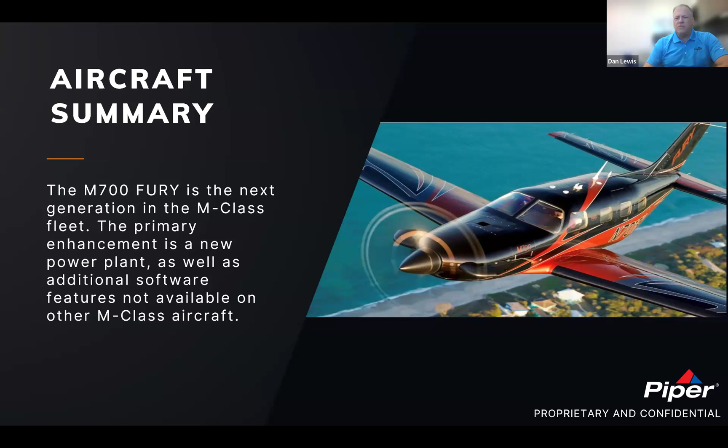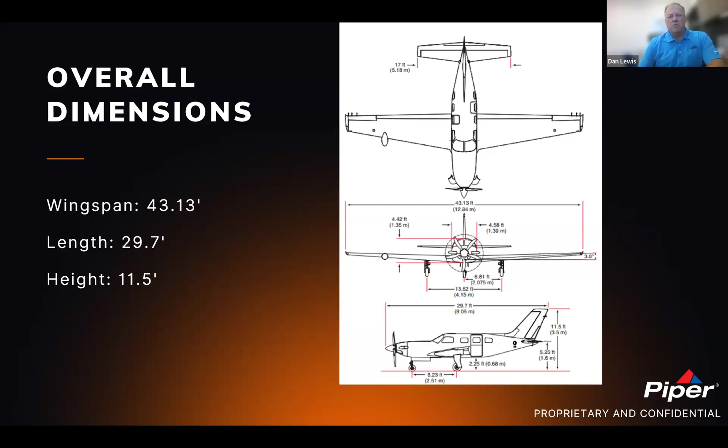The key change, of course, is the Pratt & Whitney engine from the Dash 42 to the 52. Overall dimensions are the same. However, if you look at a POH and compare an M600 to an M700, there are some slight changes in the wingspan noted. This is because when we recertified this aircraft, the actual airframe didn't change, but our ability to measure it more accurately did. So you may see some changes in the actual POH, but rest assured it's the exact same size wing, tail, fuselage, and so forth.

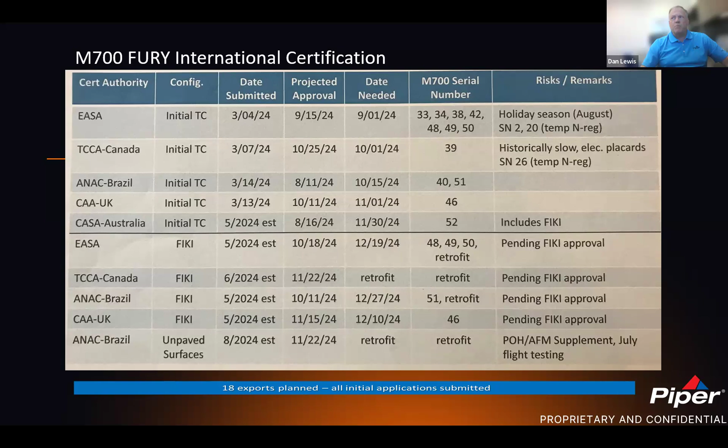I just wanted to go over real quickly for those attending internationally - we are in the process of all the aircraft certifications where we have current orders on the books. We are very close, I think, to our TCCA Canada type certificate. Not holding my breath yet, as with any bureaucratic government type agency, but these are the projections and when we need them by. We're looking at most of these in the late third quarter, potentially fourth quarter in some cases, but the majority will be the second half of the year, to correspond with the order book we have with our regional dealers in that area.

I'm not going to talk much about the power plant and electrical, just because we have Pratt & Whitney on board and I don't want to take their thunder or their time, but we'll go over it real quickly. We went from 600 to 700 shaft horsepower. We went from the PT6 42 to the 52. All current production is a 5-bladed propeller versus what we've had, the metal 4-blade, in the past. You could upgrade to the 5-blade - we just certified it with a 5-blade. There isn't really a current STC or plan at this point to go back to a 4-blade, but it could always be in discussion.

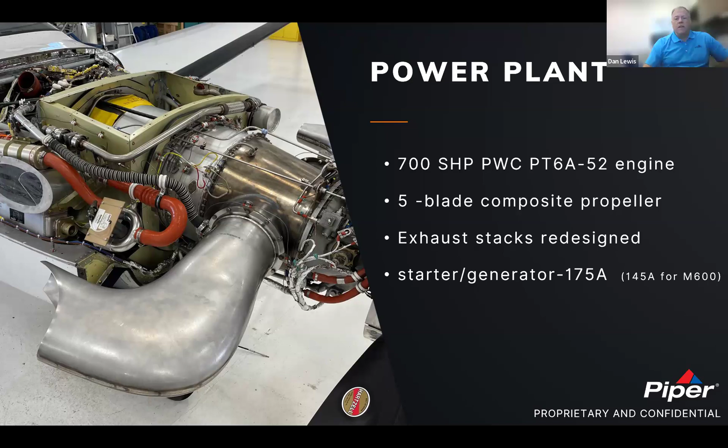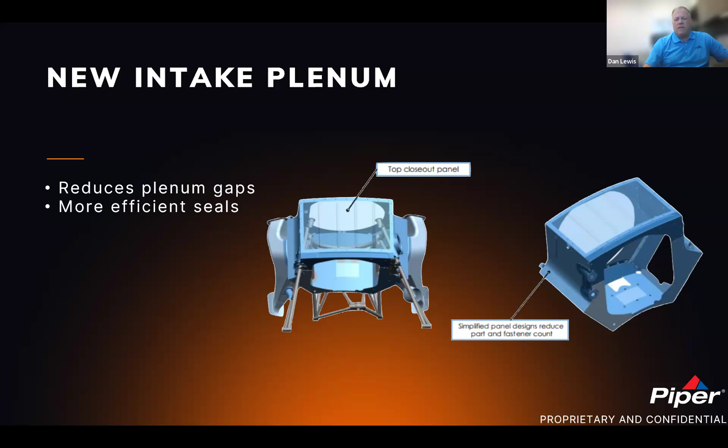Starter generator and battery have all been increased in power and support. You'll note if you get in a 700 versus a 600, it spins up a lot faster, and the starting power generates it to be a lot cooler. So from 145 amp to 175 amp is the big change there. We also reduced our plenum gaps to be a little tighter, so the airflow and pressure inside the engine compartment is a lot smoother, more efficient for the airflow.

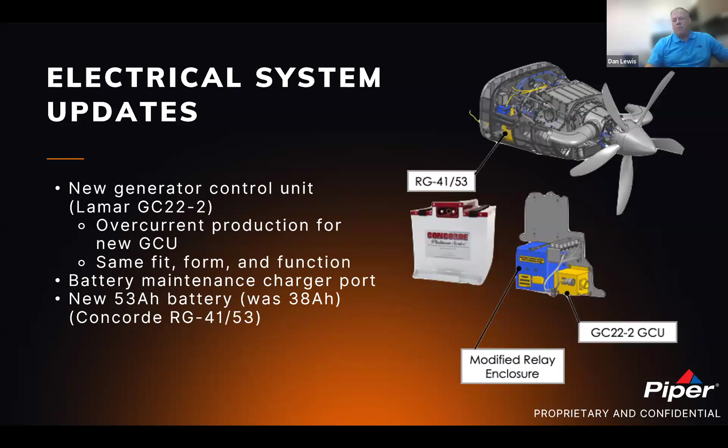On the electrical system, like I mentioned, we've updated the battery, but we've also done a battery maintenance charger port for the new 53 amp hour battery. So you can actually have a charging port now capable for your battery chargers. This battery was previously a 38 amp-hour battery; it's now 53 amp-hours. So this is the bigger battery you could upgrade to in the past - now it's standard.

In addition, before every flight you'll get in the cockpit, and if you have a CAS message that says oil level low, there's a float switch inside the dipstick compartment area that's basically telling you it's about 3 quarts low. You would need to add oil for your mission, and that sensor comes on based on a maximum mission. So if it's a 4.5-hour flight, you'd need to recognize this CAS message before you start the engine. If you know it's a short mission, maybe you just need to go to your maintenance facility less than an hour away, you could effectively ignore that advisory white CAS message.

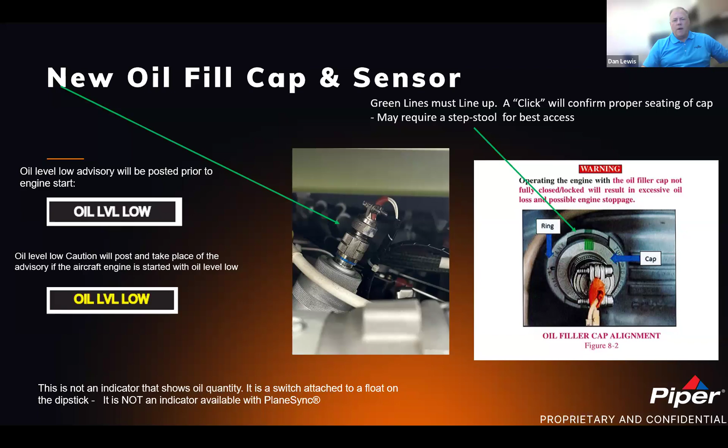You might run through a bunch of those. They are easy to break. I've stepped on them and it snaps them really quickly. But it comes with one with every aircraft. Use according to the POH for your towing capacity or towing limits.

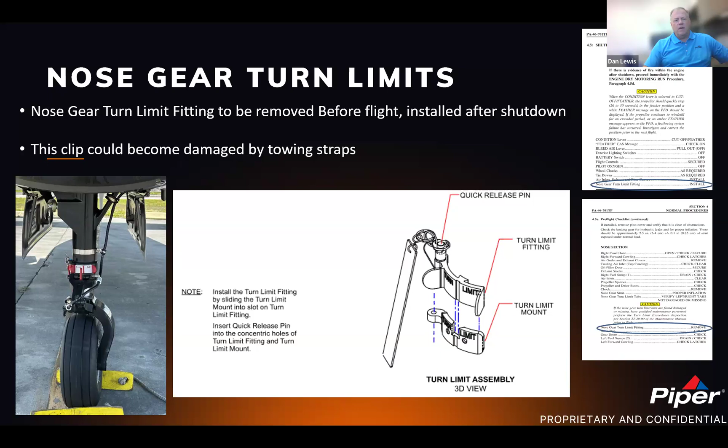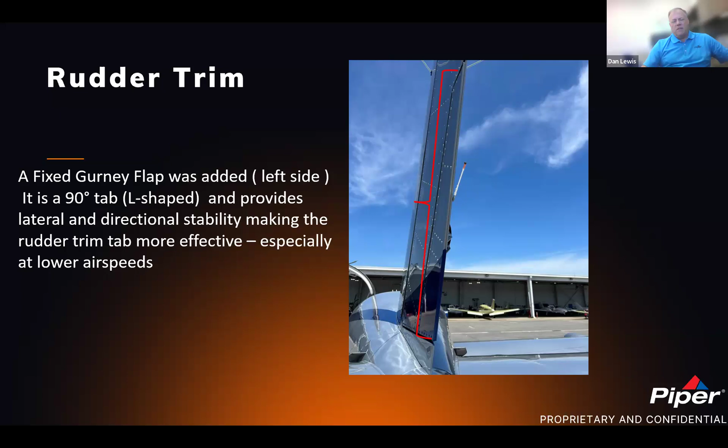One of the other changes we made to the new aircraft was we added a gurney flap, an L-shaped strip that goes right on the tail of the rudder trim. You can see in the picture I've outlined it, but unless you walk right up to it and probably feel it with your hand, you wouldn't notice it. What this does is enable the trim tab to be a little more effective in slow flight, giving a little more directional stability. I've noticed it a bit, especially on landings — it's just a little more stable, not as mushy.

The other big enhancements you'll recognize, some of which bleed into the 600 world and 350 world currently, are the new software enhancements, mainly designed for the G3000. One thing we've complained about, and I complain about it all the time when I fly the 600, is that anytime you brought the foot-pound torque back to 420, you'd get the check gear message. It's a nuisance message, especially when you're between 400 and 800 feet — it's just an annoyance, especially for passengers who don't know what that means.

So we've adjusted it in the software, so now you don't see that. If you're up at altitude doing slow flight or training, you won't get that check message. Or if you slow down and your torque drops below 420, you'd normally get that message, but now, above 800 feet, you won't get it. So it only activates in the landing phases of flight, or right after takeoff if something goes wrong.

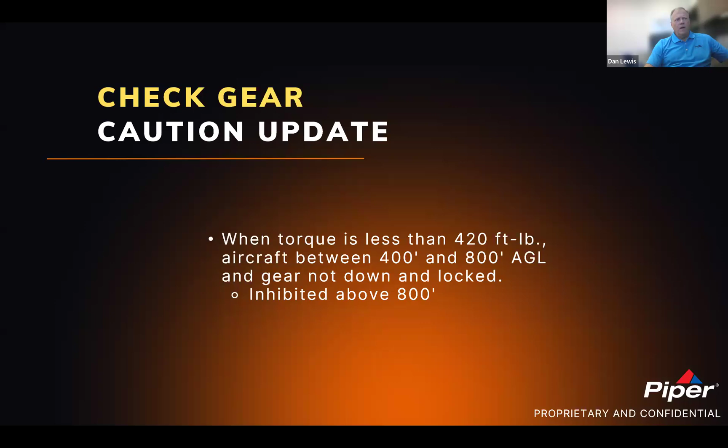So that nuisance message has gone away, and that's also true on the 600 and the 350.

Some of the new gauges you'll see, if you look at the pitch trim and yaw trim, the yaw trim looks offset to the left. That's because of the new travel and torque on this more powerful engine, it's just depicted that way on screen. It's not really offset, you still have torque factors requiring right rudder on takeoff. This is just how the setting depicts itself on the software screen.

So like on the others, if you're using auto throttle or doing a takeoff, it will chime at you if you're not in the green boxes. You'll note the green boxes are a little bigger now. You have the capability of setting it on the front end or back end of that green box, depending on your weight and balance, to help with takeoff, rollout, and initial liftoff.

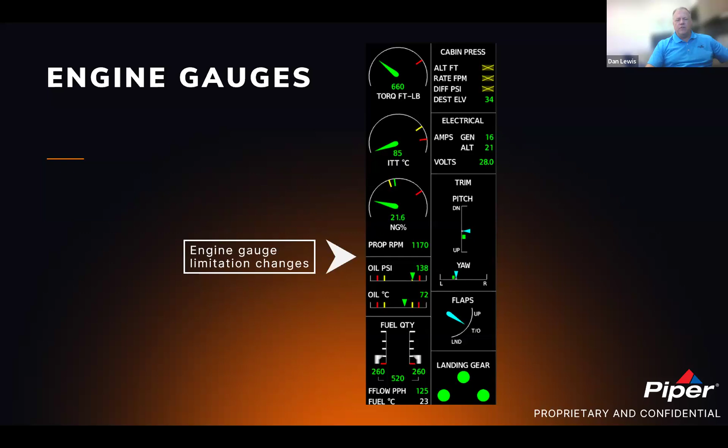Some of the other enhancements we've added to the G3000 are these synoptics pages. So you have de-ice, electrical, landing gear, engine, fuel, and aircraft systems. All of this is found in your homepage systems folder and utilities folders, which we'll go over a bit today. But these are just some examples.

If the boots are running or certain things are turned on or failed, it'll be depicted on this screen. Some people fly with the screens on. You still get normal messages on screen when things are activated, like the 3 green lights for takeoff, or gear up and gear down. But you also get the landing gear synoptics page, which gives you a more visual bird's eye view of the aircraft, showing what's working and what's not.

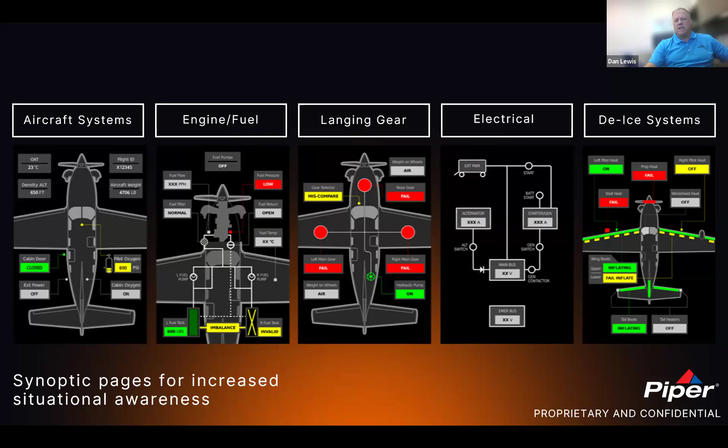Same with your electrical. On aircraft systems, on the far left one, you'll see where your pilot oxygen tank is and your cabin door close messages are. You can't turn around behind you and look at the gauge on the oxygen mask anymore. That visual tactile gauge for your oxygen is gone. You'll only see it under the synoptics page in systems.

One of the other features for all 3 models is the weight and balance page. As you go through your preliminary check prior to takeoff, loading up your pilot, co-pilot, and other passengers with their location arms in the system, it'll automatically calculate your weight and balance envelope on the left side. That's very good. Double check that your basic empty weight and zero fuel weight look accurate based on your POH. Each aircraft is a little different depending on the equipment installed, but it's been a nice system to have.

You can actually show passengers or family members who don't want to move out of that aft seat and into the rear facing seat for takeoff, that until they do, you're out of the envelope. So this is quite helpful.

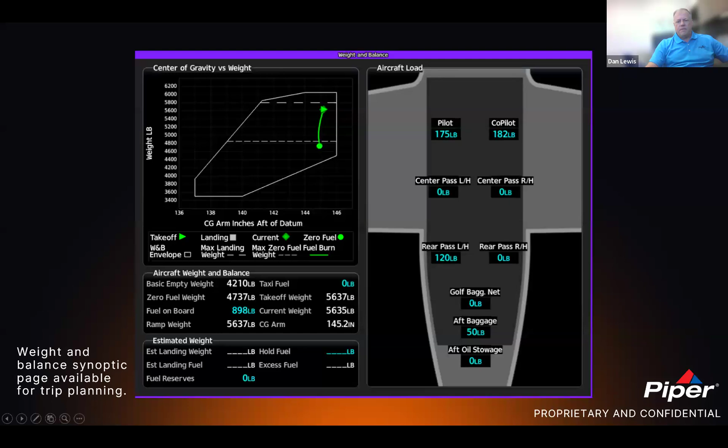Now I can get my mouse to the right place. There we go. Some of the other things we've added is a glide range ring. This is not turned on by default, though it's probably not turned on a brand new airplane unless I've done a check ride or flight with you on your acceptance. But it can be turned on easily enough in the setup, avionics setup page for your maps.

You'll see the ring looks a little jagged. This one was taken off of our test bench, so you won't see wind, for example, but it does have a wind calculation that constantly updates based on information received through ADS-B or XM weather, which helps change the shape of this ring. The higher you go, obviously, the bigger the ring. One nice thing is it will jut in or have a cutout if there's a tower. If you look at the right lower quadrant of the first picture on the left side, you'll see a tower.

And that's why it juts in like a sharp edge. It's because it knows that tower's higher than the terrain, and if you were to glide there, you would hit the tower. So it's giving you that information.

It'll also put up the capability of going on your glide. It points an arrow on the right screen and will direct you. Again, you have to turn this on, it's one of those functions you actually select. Some people don't like the range ring, or don't want the nearest airport, but it will point out the airport and give you an arrow.

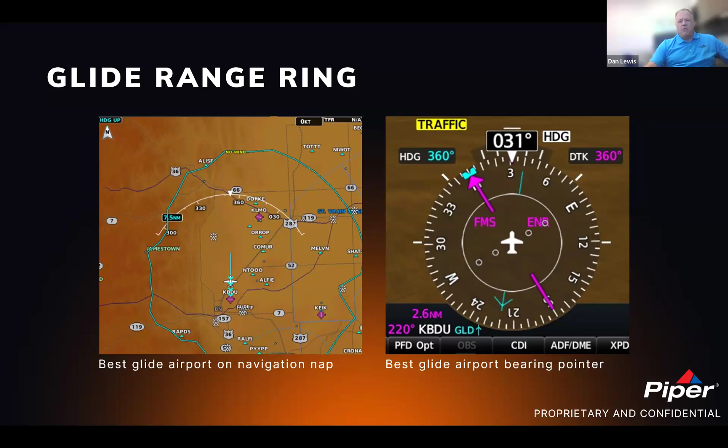So on this slide, it's showing you which runway you're headed to and which airport you want to go to. And then you can set up your navigation to help get you there. It's not automatic, but it will help guide you there at this point. It's not an auto land, or an auto glide.

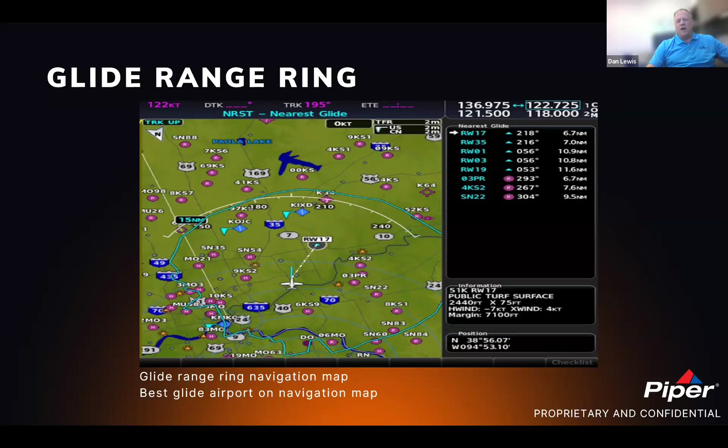So on the home page, you'll see some changes. If you have the taxiway routing option, you'll see a taxi route option on the right-hand screen. If you go to the home page and click on utilities, the utilities page shows up and you see taxi route. If you go into the setup page there, you're going to have your normal setup where you're looking at your avionics settings, your database settings, and so forth.

You'll also note on the home page that there are the performance and waypoint information. All those things are now configurable online or on your screen before you get started. I'm going to go through a bunch of these software changes in the next few slides.

So the taxiway routing we just talked about is an option you can purchase as part of the packages we have available. In the taxiway routing, when you go in—I've got these out of order, I'll show you—you go into the taxiway routing, pick your airport and enter the route. It will come up and, based on your location even, pick certain taxiways and runways that you can put in different information.

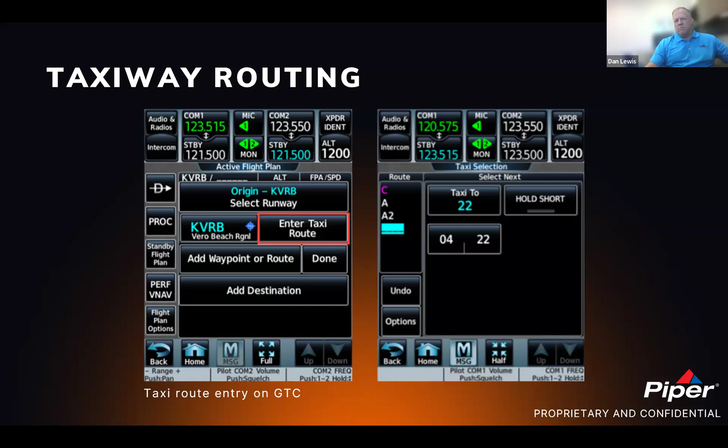When you do that, it'll populate your 3D taxi capability with a magenta arrow. So on your primary screen, you're going to get this kind of a view. On your secondary screen, or your MFD in the middle, you're going to get a bird's eye view. You can see the current route here, and then the next leg here. So it's giving you a current path, just like if you were in the air.

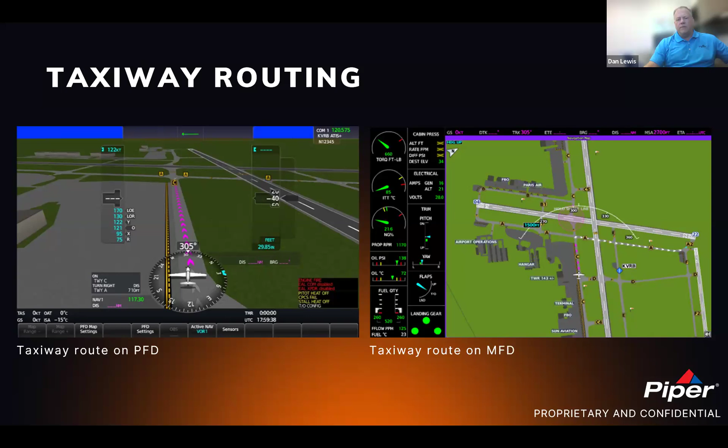The other option you can purchase is CAS linked checklists. Checklists are now standard, obviously, in our aircraft. And when you click on that checklist option on the home page, you can pull up all of the notices, normal procedures, emergency procedures separately, however you want to do your checklist.

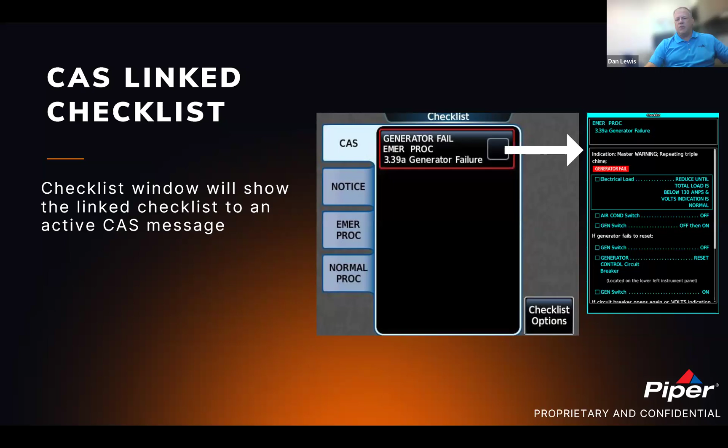But if you had an emergency situation where a CAS message shows up on your PFD, you can go to the checklist and it automatically has a link page right to the emergency you're currently having. So without this tool, you would have to fumble through the emergency procedures, just like fumbling through your POH. But with this tool, it automatically links to whatever CAS message is showing up and takes you right to that checklist, helping you move quicker in the case of an emergency.

So another option, maybe for the 135 operators or just for fun, is the cabin briefer enablement. I'm just going to play one of them.

It'll try to play all three of them here—so that's one of the three I have on here.

So isn't that sweet? To set this up, if you have it installed, you go into your audio and radio panel switch on your touch screen GTC down below. Click on audio and radios and scroll all the way to the bottom, past the music and all the other options—it's the very last one. Then on the right-hand side, you'd have a briefer enablement, and you click on the ones you want. You can stop and play. I think there's 22 of them available as pre-recorded messages.

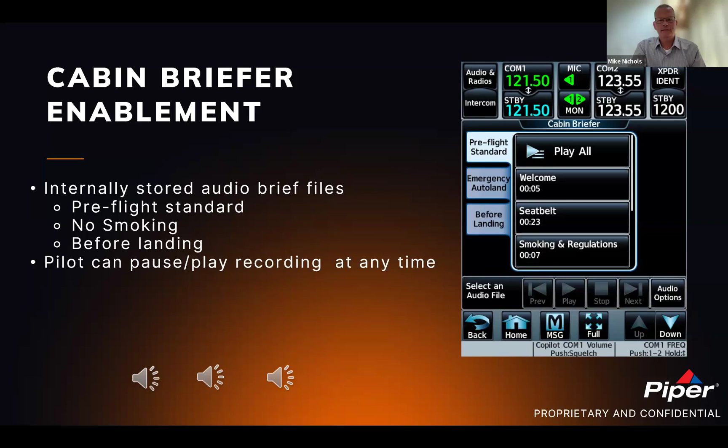Dan, that sound's not coming through clearly here, so we can't hear it, but I think we have a good image in our minds. So yeah, it was basically saying don't smoke, welcome aboard, and prepare for landing - those are the three options. If you didn't get that video and you want to hear them, I'll make that available to you.

Enhanced terrain - the synthetic vision had a bunch of upgrades with the new software on the G3000. You can see before on the left and the new on the right. It's just a lot crisper, a lot more detailed, a lot more functionality for the visual of that.

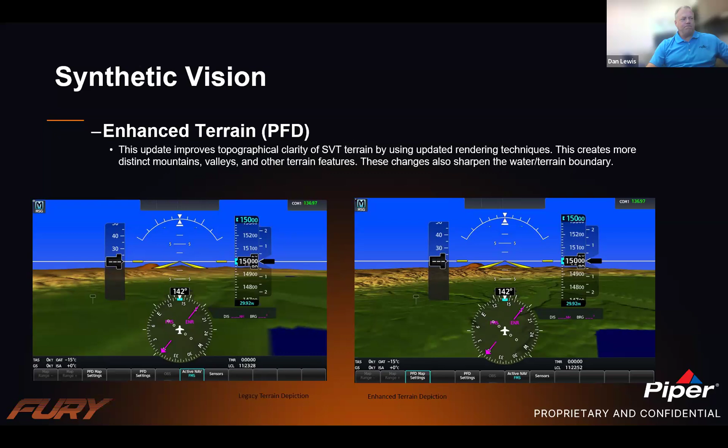In addition, as we talked about, safe taxi. Safe taxi can be seen on the left screen, above, in front, and below - your airports are shown. If you go to the PFD settings button and go into the view, you have auto, flight, or off.

So for synthetic vision taxi, if you look at the right-hand side, we've got kind of a bird's eye view behind and above the aircraft. That is in the auto mode, and that means when you're on the ground, it's going to give you that overhead view.

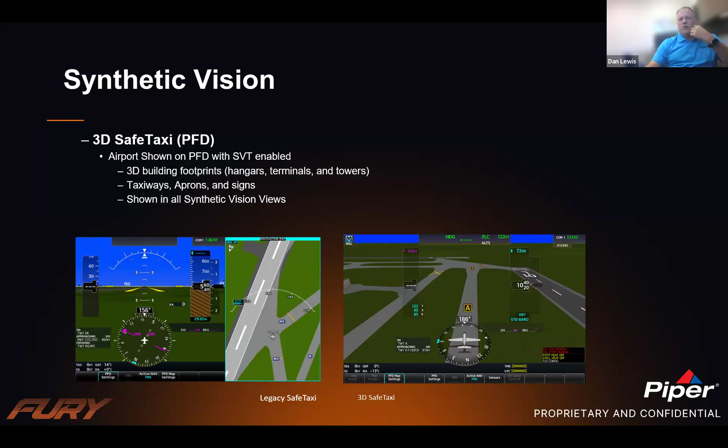If you turn that off, it's just going to give you a ground view, just as if you were looking straight ahead and taxiing. Like on this slide here, well, even this one is not showing it the way it would - it'd be more like the one on the right. So the one on the right would be your normal ground taxi operation.

If you set it to auto mode, it will have this bird's eye view behind, so you're watching yourself taxi in front of you.

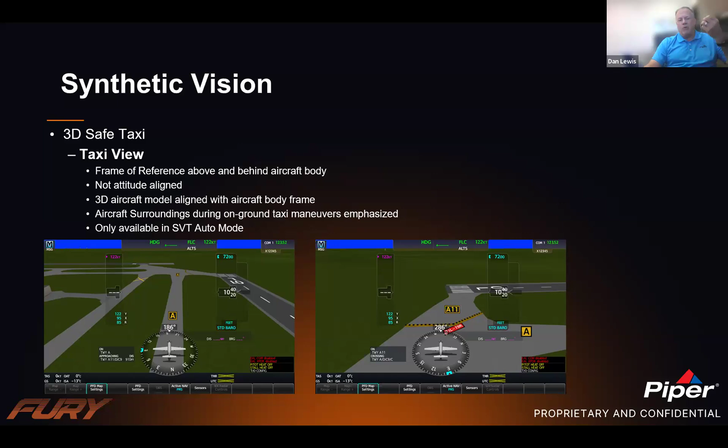If you have it in auto mode, you get this view for taxi, but once you get to the runway threshold, like on the right-hand picture, and you cross that threshold and line up on the runway, it will auto put you back into flight mode, which is that visual like you're used to seeing in 3D synthetic vision. So those are the different changes you'll see on the new software.

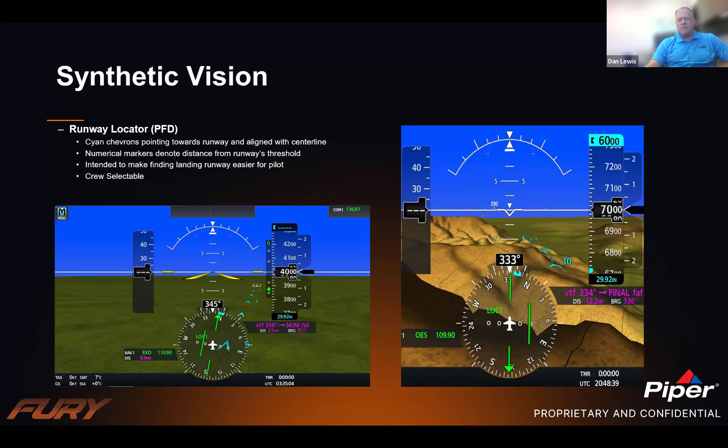One of the other nice features I haven't really used a whole lot yet, but I find it interesting - you can do takeoff and landing assistance. You can set up all kinds of criteria for yourself, your own limits, your own thresholds of speeds and where you want them for takeoff and landing.

So this is just a helpful tool for a lot of people. Again, I don't use it very much, but I find it quite interesting that we have that level of detail to aid in planning your flights and runway lengths.

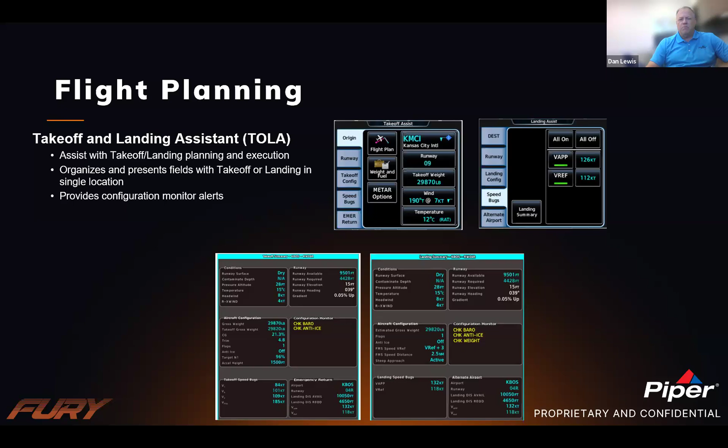Another update was the GWX8000 option that you can use with your GWX75 radar - it's been enhanced and updated to include the lightning and hail prediction features. So that will give you a lot more detail.

In addition, it gives you the moving map settings with it, not just radar, where you'll actually be able to have that radar screen up and embedded traffic or land sites, landmarks, and so forth. I kind of like a clean radar personally, but you have that capability without having to move it onto your moving map screen.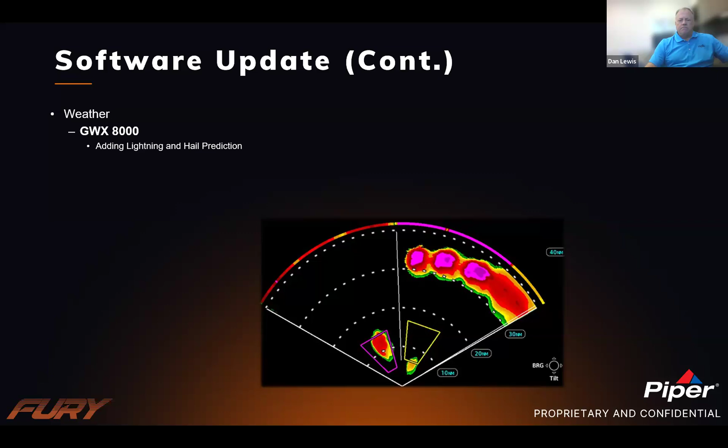One of the things that has caused a little bit of confusion for people is Garmin Plane Sync. We'll go over that a little bit here. Basically, Garmin Plane Sync is a software application that you can have on your PED, or personal electronic device, your mobile phone, an iPad type device, or so forth.

Garmin Plane Sync operates very similarly to a telephone. On the box itself, you have 4 antennas. 2 are LTE or cellular antennas, and then the others are Wi-Fi, and it's also got Bluetooth enablement. So this box, if you're used to FlightStream 510, contains all the technology the FlightStream 510 has.

But in addition, it can remote access your PED from home with the LTE connection. That is something FlightStream 510 couldn't do. The FlightStream 510 was only used in the cockpit to communicate with your device, uploading and downloading flight plans, weather, and so forth, through Bluetooth or Wi-Fi. It wasn't always reliable.

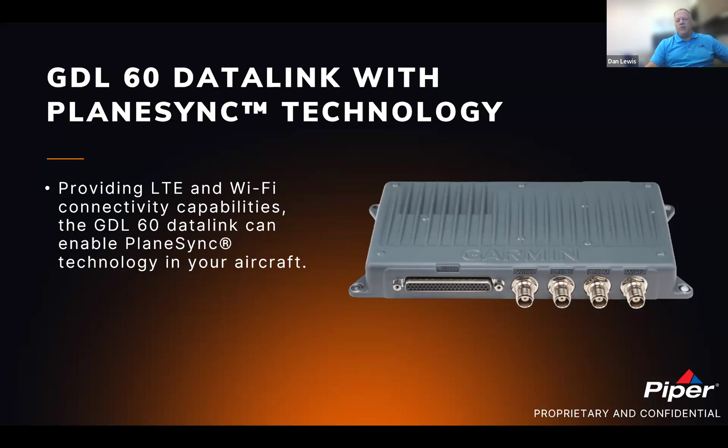But with Garmin's Plane Sync, in addition to the items you can communicate with your system in the aircraft, you can be at home and look up information about your airplane through mobile technology. So on an iPad screen like this, you would get information about your aircraft, like the oil temperature and the outside temperature. If it's in a hangar or not, you'll know the difference.

On that right-hand side screen, you can see if the databases can be updated or not. You'd click on Plane Sync, the little blue arrows that look like a circle on the right-hand top of the main screen, and that will automatically go out to your plane where there's a mobile device. If it's got access to a cellular tower, it will wake up the system briefly, download the data, and then turn itself right off.

It does have some limits based on battery life. It's not going to drain your battery dead, but it will go out and collect that following information. If you ask a flight line person to go fuel your aircraft, you check it an hour and a half later, and you can see it hasn't been filled, you can make that call.

So this is all before you get to your airplane. You can have all kinds of information listed here remotely, but that's only available on Plane Sync. You would not be able to do that with a FlightStream.

And Plane Sync only works with a FlyGarmin account. In other words, if you had ForeFlight and you use ForeFlight to connect with your cockpit resources, like with FlightStream 510, you could still do that with ForeFlight, but you'd have to be in the aircraft. Plane Sync, this capability of remote cellular access, is only available using the Garmin Pilot app.

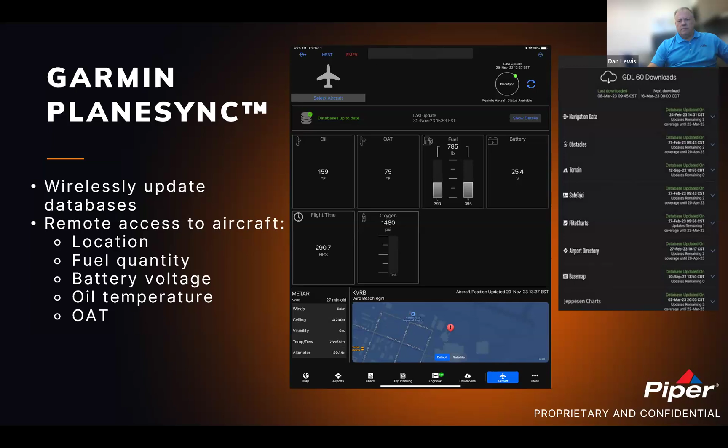Subscription for Plane Sync, with the M700, you get your first year free. After that, you would have a monthly subscription, depending on if you did worldwide, Wi-Fi only, or international. So $30 a month is the current Plane Sync subscription through Garmin, and we would help sign you up for that first year free on an M700. If you're international, you would also get that for free the first year.

After that, it's up to you which version you want to take and how you want to continue with that information, but that does give you LTE capability of remote access. If you just do Wi-Fi only and you have a hangar with a Wi-Fi connection, you can still connect to your airplane remotely that way, but currently, LTE is the only way to do it otherwise.

And then just briefly, I'll touch on some of the performance numbers we're seeing. The POH says max cruise is 301 knots. Personally, I flew up for the AOPA Washington flyover event with the Fury, and I was getting 302 to 303 knots on the way up, indicated, and I wasn't using auto throttle.

I wasn't at a max setting, flying at cruise the way I fly, trying to burn less fuel, and I was getting 301 to 303 knots. On the way home, I decided to use the auto throttle and set it at normal cruise, and I was getting 303 to 304 knots indicated on the TAS. So we're exceeding the book in a lot of cases, and that was at flight level 260.

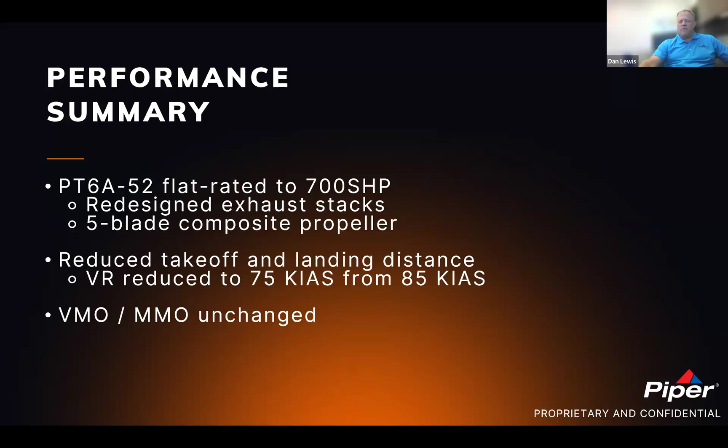Here's some of the raw numbers we show in the book. If you slow the aircraft down and match your maximum M600 speeds, you get just about the same range, and in some cases better fuel, about the same fuel burn. It is a bigger engine, so it's going to burn more fuel on average, meaning your costs of operation will go up.

I'd suggest you talk to your dealers, and if they haven't talked to us already, I'm sure they all have. Each one has their own demonstration devices or information for you on actual fuel burns, depending on your region. A lot of times it's different just in altitudes, terrain, and climates.

Your takeoff distance has decreased, your landing distance has decreased. Majority of that is due to the 5-bladed prop. In the M600 POH, everything was calculated based on a 4-bladed prop, and also without using beta reverse, so our performance numbers look a lot better. A lot of it is the new engine and some design features, but the reality is most of that is due to changes in the POH and how we measure the information. But there is significant gain otherwise.

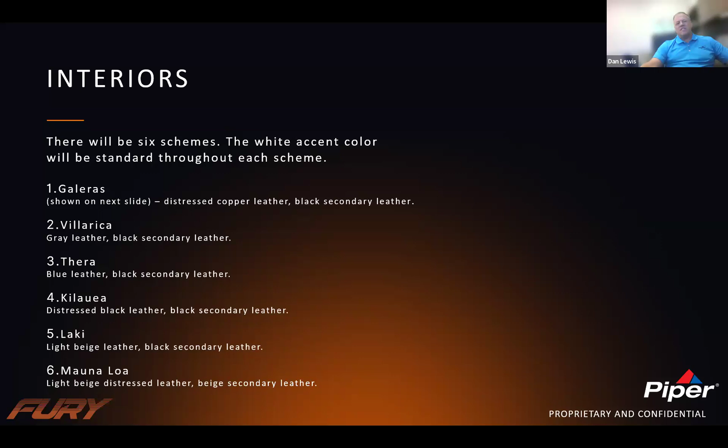So Galeras is, if you've seen our demonstrator, the interior color scheme we have inside our aircraft. Villarica is a volcano in southern Chile that I personally love to go fly fishing around. Thera, Kilauea in Hawaii, Laki, and Mauna Loa - a lot of those are the Hawaiian chain islands. Some of those probably sound familiar, but when you see them, it's a little difficult to pronounce. I apologize for that, but we wanted to stick with that earthly theme and raw power.

So here's the colors, a little more detailed for you of what the combinations can be, including the carpets. We have an accent piece, which if I show you this next slide, you can see is this line accent on the headrest, the seats, and on the seat backs. What you're seeing is the distressed copper leather and the Galeras interior.

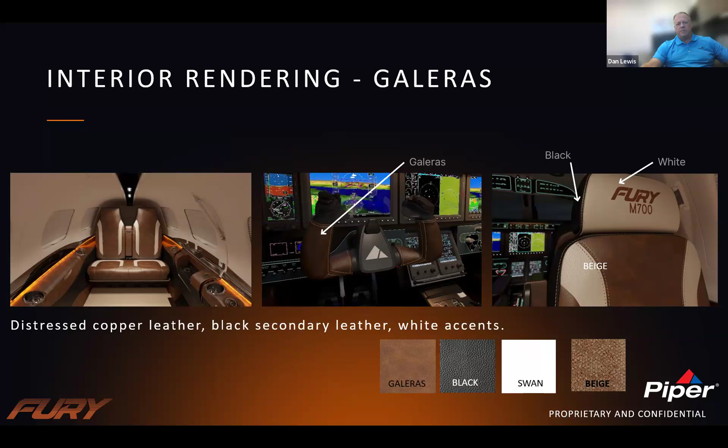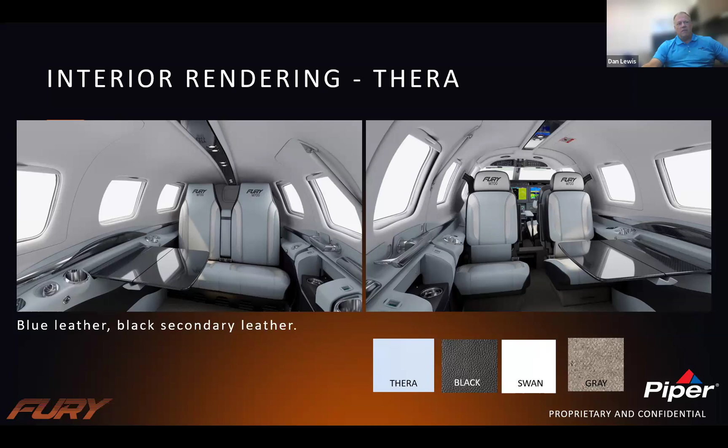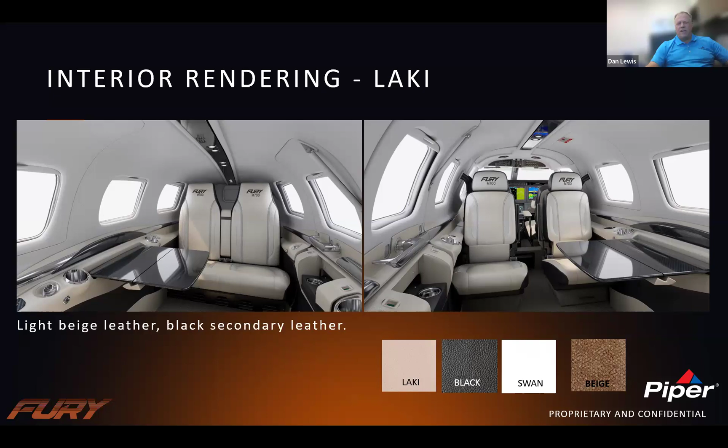Mauna Loa is very similar to the Galeras as well.

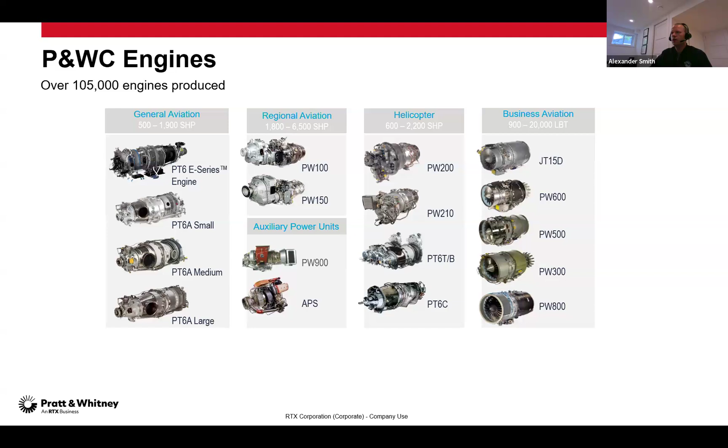So we're going to go over a little bit, high level, in terms of Pratt & Whitney Canada. We've got over 100,000 engines which we've produced, and they range from the very small PT6As, APUs, all the way up through regional aviation, helicopters, all the way up to our latest PW800, our turbofan engine. So we cover the full range, going from 500 all the way up to 20,000 pound SHP. In terms of the PT6, we have just over 53,000 engines produced.

Just about half of those are currently in service, pretty much in every country in the world, with 450 million hours of flying time. So obviously a lot of hours under our belt, a lot of knowledge, a lot of lessons learned that we incorporate in all of our new products. We always like to put the highest time engine up there as well - 68,000 hours on a 65B. So that's pretty cool.

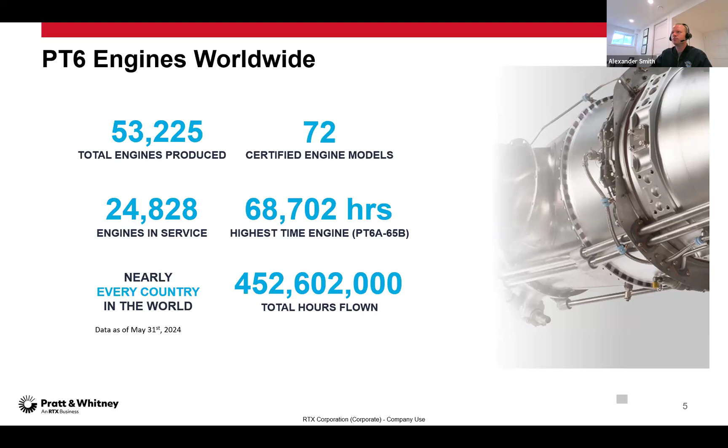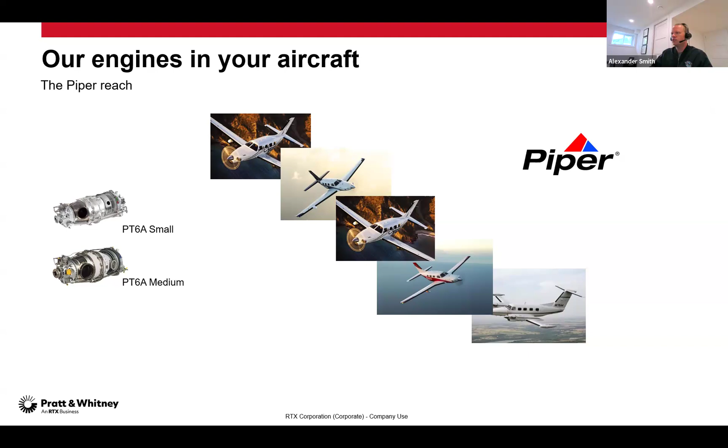For Piper, especially in terms of Pratt & Whitney Canada powered aircraft, it's the 42 Alpha and now the 52. The 42 Alpha was in the M500, M600, and now the Dash 52 is going to be in the new M700. We're just going to have a little look at the differences between these two installations. I know Dan previously discussed that.

From a high level perspective, Dan's already mentioned range is pretty similar. It's obviously quicker, and you've got a little bit more SHP as well, and you'll notice the ITT is a little bit hotter as well. Just something to keep in mind.

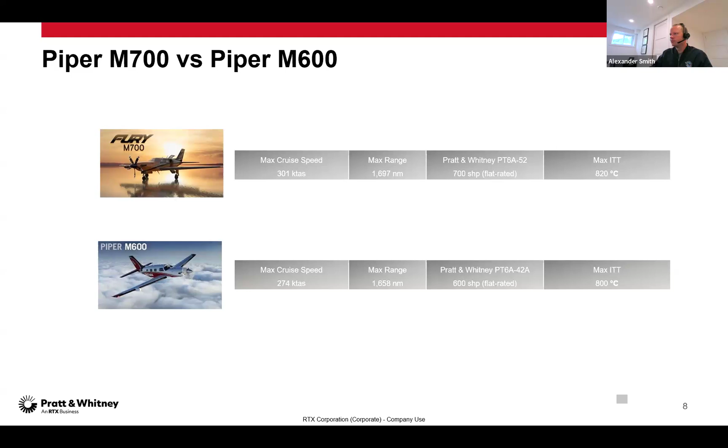This is about as detailed as I'm allowed to get in terms of going into the internals of the engine. I had something a lot more detailed, but then I was told no, so I had to remove a bunch of stuff. But this, I think, is a pretty good overview.

I've got the 42 Alpha at the top here, and underneath the 52. You can see from a PT6 side, it's still a PT6, so it operates pretty similar, but there are obviously some notable differences. We'll just go over those from a high level.

In terms of the vanes, very similar number, exactly the same number. You've got an extra CT blade, you've got some more PT1 vanes as well. And on the 42 Alpha, you have a 2 flowing BOV, whereas on the 52 you have 1 with a flapper valve. So a few minor differences, but in general these are just very, very small tweaks. It does give us a lot more power and everything like that.

Before we go on, the other thing I wanted to mention is that the 52, we do have it in other applications as well. It's been in entry into service since about 2007. It has about 500,000 hours or so in terms of flying hours, so we've got a lot of experience with this engine. Very excited to have it on the M700, and I hope you guys are going to really enjoy it as well.

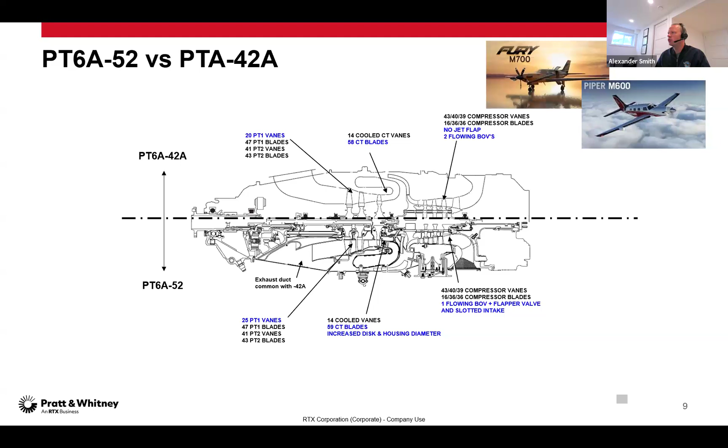And obviously the other thing is that it does have a Woodward fuel control as well, just like the latest rendition of the 42 Alpha. So that's something which I know a lot of people are excited about, is to have a Woodward and not a Honeywell fuel control.

In terms of service center training, I know a lot of the service centers and dealers already know about this, but just as a reminder, we do offer line and base maintenance courses through our partner Flight Safety. They do a 5-day training course for the large, which is what the 52 would technically class as. A lot of you probably already service the 52s today, so it might not be necessary, but if you do need a reminder, Flight Safety is who we'd recommend for this course.

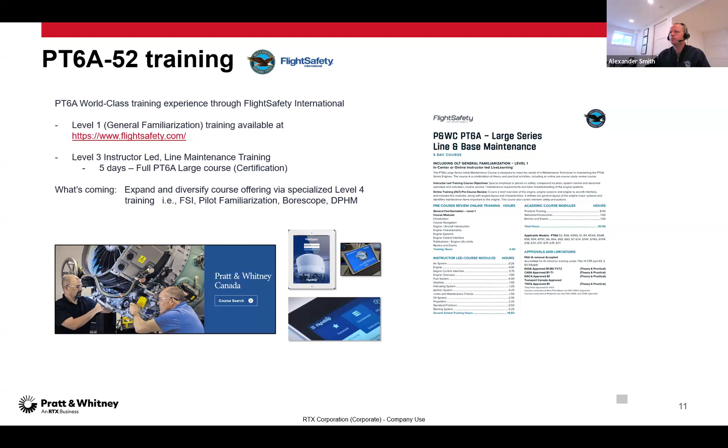In terms of all the 52 publications, that's all now up to date on the MyPower portal, so you can go down there and purchase those. You've got the maintenance manual, the overhaul manual, etc. That's all up to date, something you can go and look at. As always, if you have questions, there are some small differences. In general it's pretty similar to the 42 Alpha, but there are some notable differences. If you have any specific questions, feel free to give me a call and I'll see if I can help.

I'm not going to go too much over best practices today, just because a lot of people getting into the M700 - I think there's going to be a lot more people around the 1st of November when we do the conference. I'm going to spend a lot of my presentation in November on best practices and really dive deep into it at that point. But I wanted to bring up a couple of lessons learned from our other installations which use the 52.

That's really just in terms of oil checking. When you manually check the oil, make sure you wait 10 to 15 minutes after shutdown. Always try to be consistent, get into a nice rhythm, and make sure you add oil when the engine is cool. I think Dan touched on how to click it back into place and everything like that, so that should be reasonably well understood.

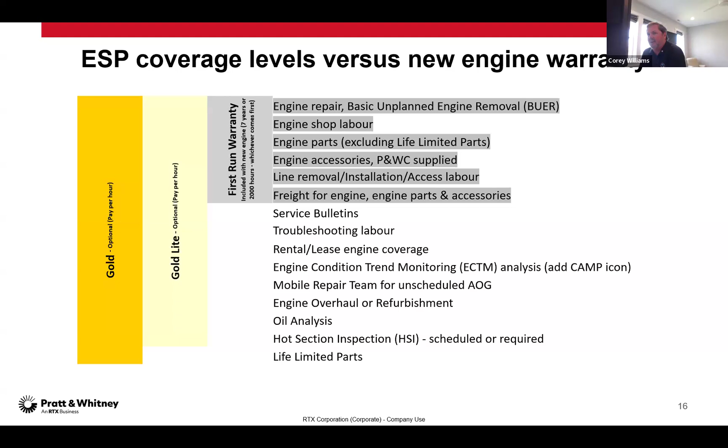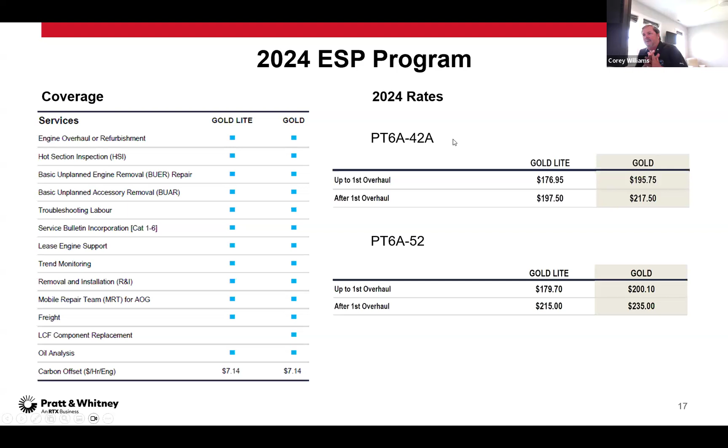The total value offering - we're giving 400 hours for free at the beginning of the program. So whenever you purchase the aircraft, your first 400 hours are on us - 400 hours or 2 years. As I said, we've got the discounted hourly rate up to the first overhaul, and you can opt out of this program at any time. If you get to the end of the 400 hours and say it's not for me, you can opt out. It's giving you that enhanced coverage, even further than the warranty would give you.

With the program, you've got predictability of cost and risk protection, enhanced aircraft resale value - this program is fully transferable from one owner to another. We've seen a major gain in the PT6A program across all PT6 segments, a major increase since probably 2016 when that first 400 hours was initially created - which is what we call ESP at Pratt Whitney. It's very flexible - if the new owner didn't want it, you can roll it into another contract, or if you had another Pratt powered aircraft. There's no annual minimums - this is the biggest bonus separating this from similar programs with other OEMs - no annual minimum and no upfront management fee. You just pay for every hour that you fly, and that's it.

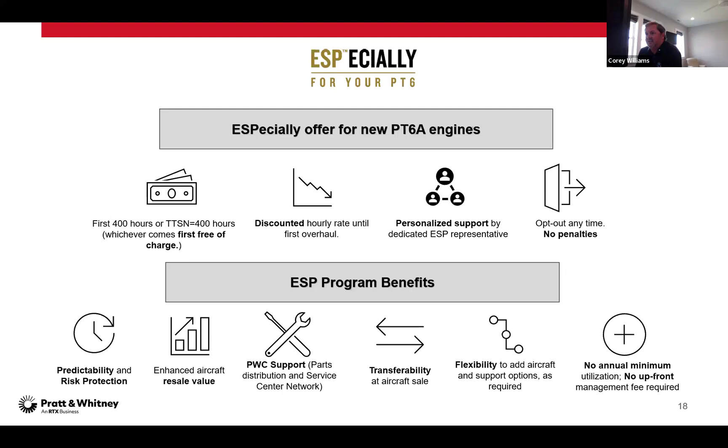So the process is fairly simple. You complete the ESP request form. This is how we're going to create the contract or the quote, depending if you've got time on the aircraft, we'll have to do a quote. If we do a quote, same form, but it's just basically who we're going to be making the quote out to. And then if you're going for the contract, it's who we're going to be making the contract out to, who's going to do the reporting and that sort of thing. So it's a very simple process.

You send the completed documents to EspeciallyPT6@pwc.ca or to myself, and it basically creates a contract for you to review. Once you've reviewed that contract, it's all done through the portal. You just sign and upload to the portal, and then you begin reporting your monthly flying hours cycle. So you basically do your own self-reporting. If you fly 15, 20 hours a month, you put that in there. It generates an invoice that you then pay.

You also do the monthly engine condition trend monitoring, which I think Alex will get into here in a minute. But the engine condition trend monitoring is all covered. That CAMP subscription for trend monitoring is covered under the program as well. So that's kind of the short, narrow rundown.

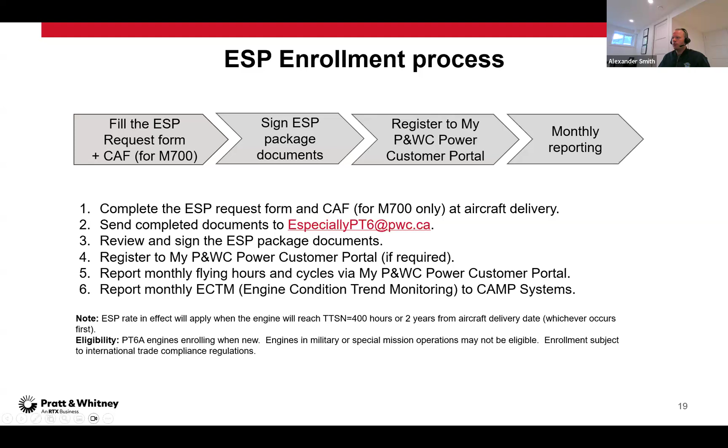So in terms of trend monitoring, this is something which I have mentioned before. It is important to be able to properly follow. I think you guys know your aircraft better than anyone, but at least being able to track what your aircraft's doing and what your engine's doing is going to be able to catch problems before it's too late, obviously in terms of aircraft resale as well. What's actually going to be interesting and new for the M700 is that we're now, through CAMP and through Garmin, doing basically an automatic download. So you no longer have to upload everything to CAMP, which is the trend monitoring service that you use. It's now all automatically done. You just have to sign the CAF form, send it back to us, and then that's all automatically done. So it makes that whole upload process a lot easier.

Something that we got back from the community that I've seen a lot is really just in terms of having to upload the data, it takes time, it's long, it's complicated, and I know there are other solutions out there. So we rethought it and see how we can make trend monitoring easier. From our side as well, trend monitoring is so valuable because the amount of times somebody calls me up and says, this happened, I had an ITT exceedance, I had this, I had that.

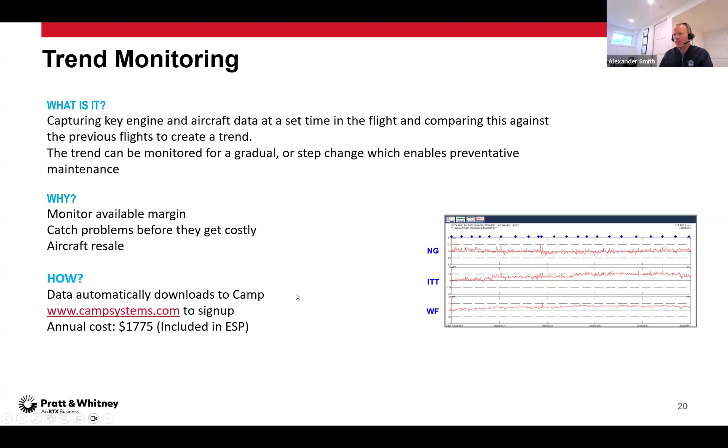Oil analysis technology is something else which is included in ESP. Basically, it's a way that we're able to see the health of your engine, bearings, gears, carbon seals, and see if there's anything which doesn't seem right. We send you out packs, you send it back to us, and then you can see the results online. It's a growing technology, and it's really another way for you to monitor your engine, along with trend monitoring, just to make you feel more comfortable.

And again, that's included in ESP. Otherwise, it's $550 a kit.

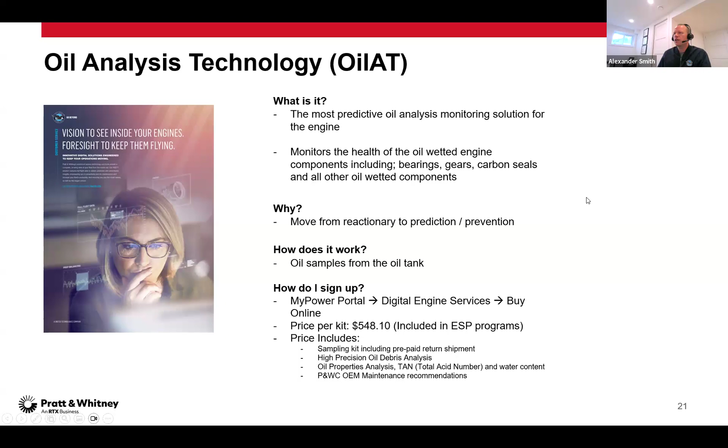We have an app, which I think we've mentioned for a couple of years now, the Know My PT6 app. It's pretty good. It'll tell you all the latest in terms of your engine, if there's a new service bulletin which has been released, any news on the engine, if you need to do any required maintenance, all that sort of stuff, it's all included. So even though I know your service centers already know all of this, it's always good to know if you think you'll need to come in earlier than your scheduled annual. At least you'll be able to follow that on the app.

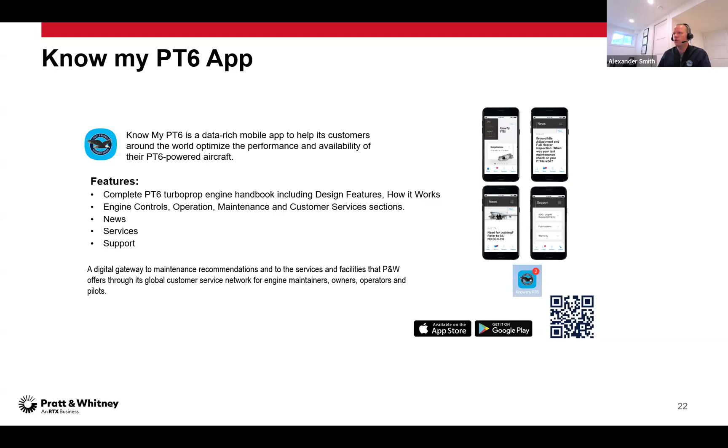And then finally, just a note on CFirst. So CFirst is 24/7, 365 days a year. These guys will offer technical and commercial support all the time. So if you have an AOG, you have an issue, you have a question, their email is there. Otherwise, you can call them and there's always somebody there. So you guys have my phone numbers and email and contact information, but if I'm not available for some reason, CFirst should always be your first point of call, just to best support and keep you guys flying.

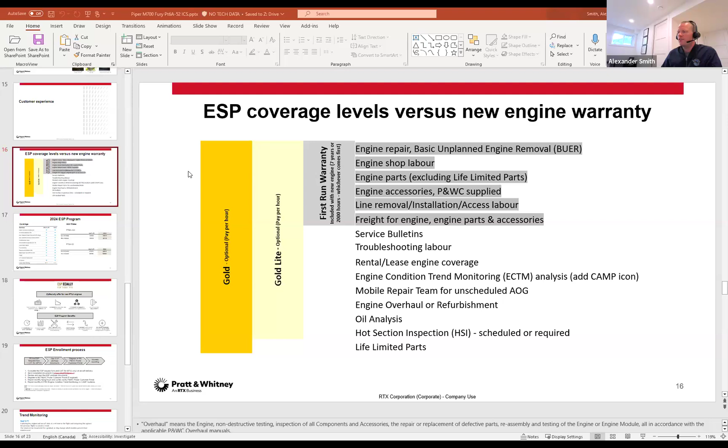You're also, I'm not sure Corey if you mentioned this, but you're basically paying your way to your overhaul as well, which from a Piper standpoint is a very, very long way away. Typically average hours around 125 to 150 hours. So no one's really thinking about overhaul, but what I think does add value to the ESP program is when you go to sell the aircraft, the fact that you've been paying into that means that, from a resale perspective, depending on the dealer, you are basically going to have a higher resale because you are paying down that overhaul. So I'm not sure if that's answered the question or not. If it hasn't, please let us know and we'll try to make it a little bit clearer.

Thank you, gentlemen. Next question that came in is: is an HSI cheaper with trend monitoring? Corey, are you - is an HSI less expensive with trend monitoring?

From a trend side, you can certainly see any degradation prior to it getting too bad. Alex, you could speak more to that probably from the HSI side. Basically how I see it is that trend monitoring, when you go to your service center for an HSI, will trend monitoring make it cheaper? Probably not, but you also are going to know if you're going to get a more expensive HSI. You can also use trend monitoring, and again we're talking many years down the line, but if you're ever a high flyer doing 250, 300 hours a year and accumulating a lot of hours, then we can sometimes offer what we call TBO extensions based on trend monitoring.

So that's something as well that we can look into. But just having your trend monitoring, I suppose it's really a preventive measure for you to be able to see if there's something in your engine, because your engine obviously talks to you. So if there's an issue, or if you're noticing ITT starting to spike up a little bit, you can go in earlier, see what's going on. There might be something wrong. You can correct it. And then, in theory, by doing that trend monitoring, you've sort of maybe made your HSI cheaper down the line. But just from a trend monitoring versus HSI cost, there's no direct cost apart from the fact that it's more of a proactive rather than a reactive service.